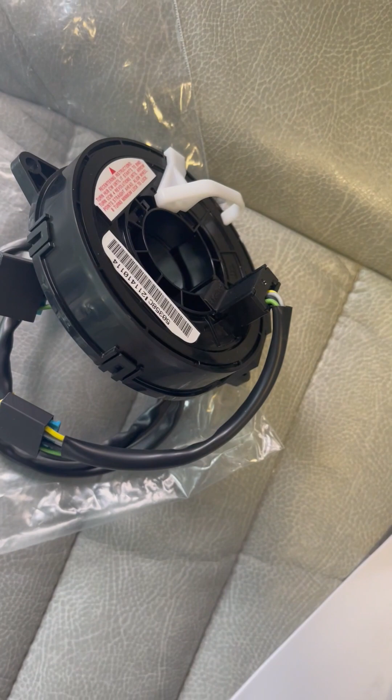Here are the parts that come with it. This is an instruction manual that we downloaded online. And here is a list of the tools that you'll need.

For step one, you got to take the top part off the steering wheel, the cover, and you basically just pull from the front first, and it just pops out. Those two little plastic things go in the two holes. There's actually 4 of them.

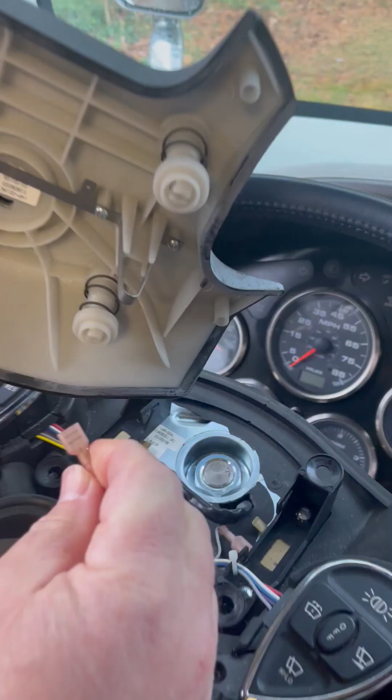Next thing you have to do is disconnect the horn. It's just a wire clip. You just pull it off, twist it back and forth. Be gentle with it, though. There it is. Next thing we have to do is take off the bolt holding down the steering wheel.

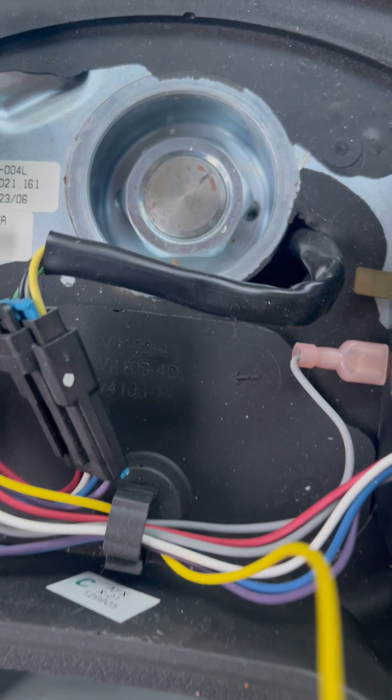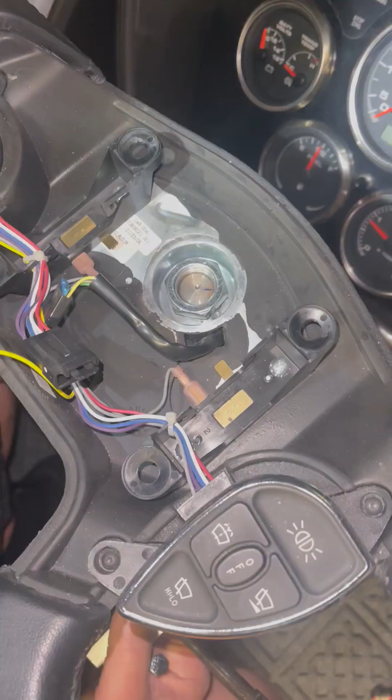And there it is. We rented sockets from AutoZone to do this. Basically put the socket on, turn it counterclockwise to loosen it up. All right, so first we have to take the bolt off.

Okay, it's off. So now we have to use the steering wheel puller. I got this at AutoZone.

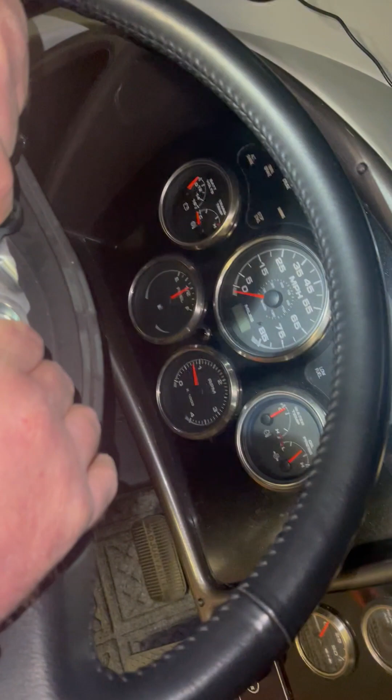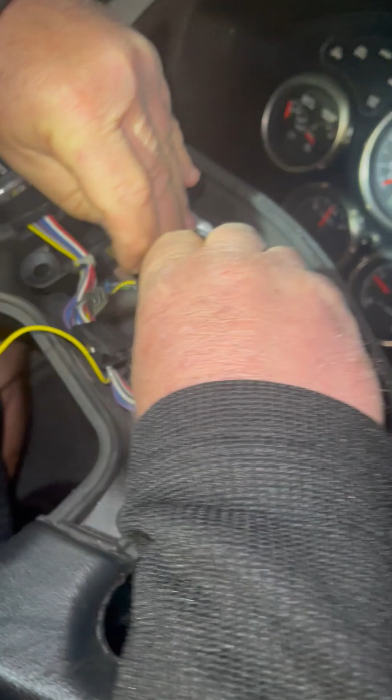And anyways, the way it works is this piece screws into here like so. This is what applies the pressure and pulls it out. But in order to hold it down, you have to use these bolts. There they are. You put one on each side, and they actually screw right down into the steering wheel.

Get an angle over here. So you screw these down in as far as they'll go. Okay, so it should look like this. Then you're going to screw this down.

Now, one thing I will say is these bolts, I had to go up to Ace Hardware and get different bolts because the ones that came with this kit did not thread into the holes into my steering wheel mount there. So I had to go get new bolts.

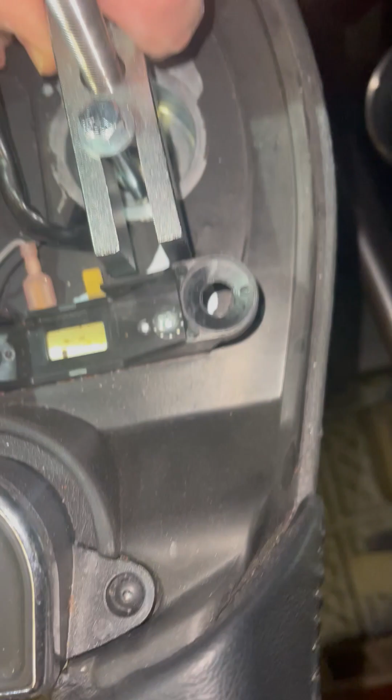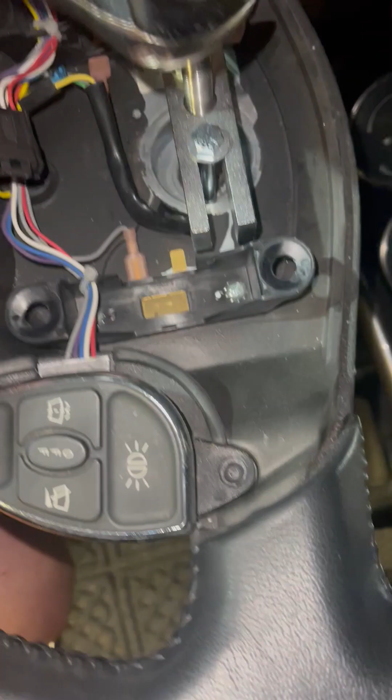And anyways, you screw this, start doing tight, make it somewhat tight. What I did, I just took a crescent wrench and went on this. You're supposed to use a socket, but I didn't have one handy. So you go like this, and it literally makes a small popping noise, making it loose. So it's loose now.

Then you just unscrew these to take it off. That's literally all this puller does. Just evenly distributes the pressure pulling upwards. And then as you can see, it pops right up. The steering wheel comes right off.

But you do have to disconnect this. This is one of the connections from the clock spring. Anyways, what you got to do is just pull back on this piece right here. You pull back, wiggle it a little bit, and it should pull right, and there it goes. It disconnects. So that, because that's going to have to go through there.

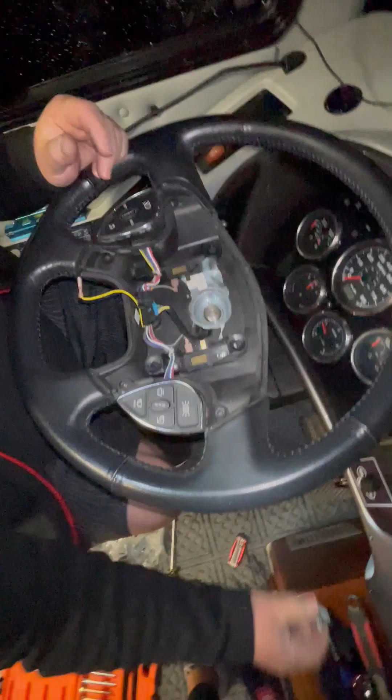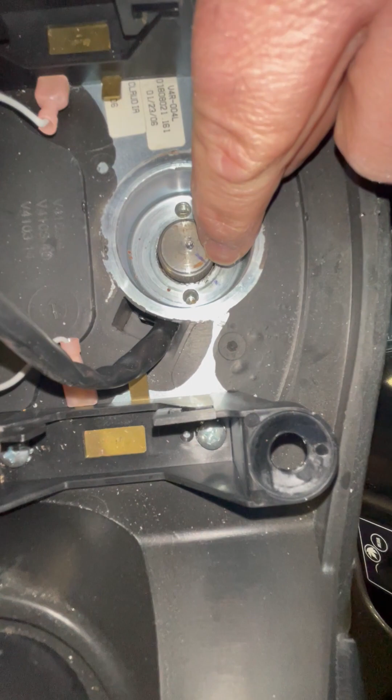Anyways, yeah, and make sure you save this bolt as well. Just keep it off to the side here. Oh, and the other thing I did do, I made a mark. You see where I took a pen? I made a mark so I knew where to put it back so it's lined up the way it was.

Okay, so with the wheel off, you can see I'm just going to push this connector through so I can pull it off. So the wheel's off now. I'm just going to put this down to the side. So then you got this plastic piece like this, and we're just going to get this plastic cover off, and right there it is.

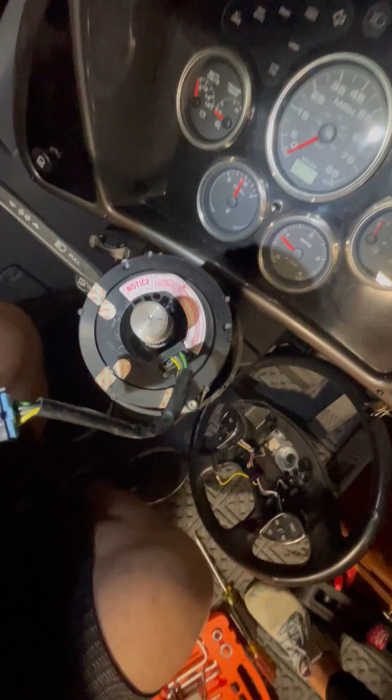All right, so here we have the gap hider. I call it the plastic cover. If you notice, it does say clock spring must be recentered before wheel can be reinstalled. I've watched a few videos on this, and I'll show you how to do that once we get to that point. It does say you do need a Torx T20 screwdriver.

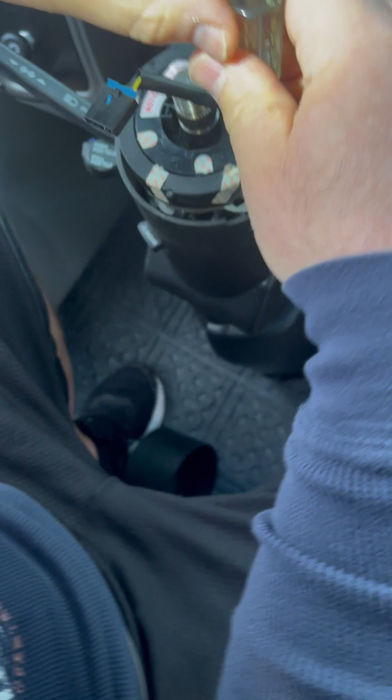Here's what the end looks like. And you can see the screws, it goes right in there. And you're just going to unscrew it like so. Make sure if there are any washers, you keep those too. It doesn't look like there are any.

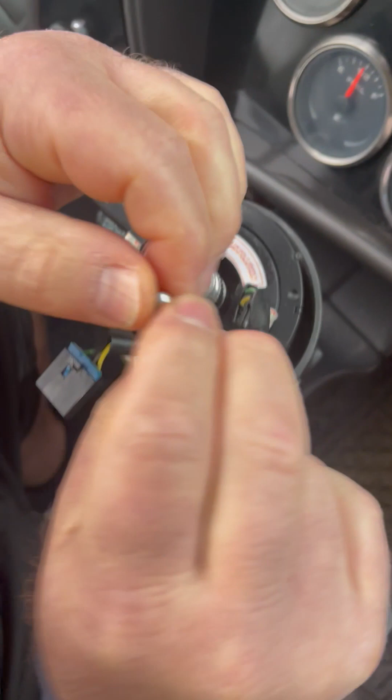There's just 2 screws, one on each side. Make sure you remember how this is aligned. It can only go back on one way, I guess. There you go. There's the other screw. Keep those screws together. And this basically just pulls right off.

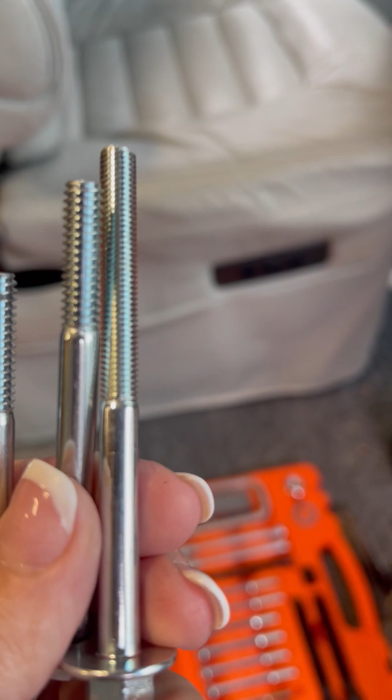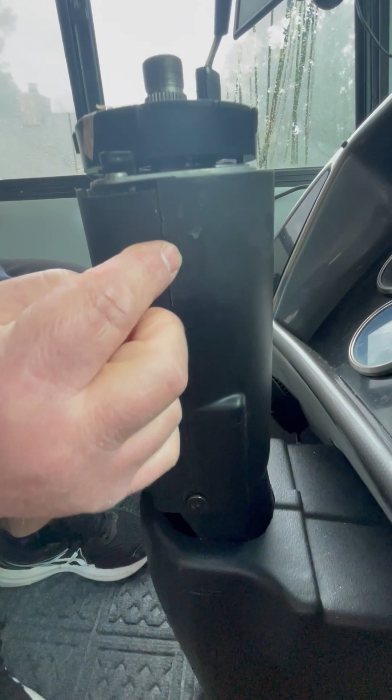So now we're going to remove the upper and lower covers that go around the steering column. If you grab, you see they're plastic things that just pinch onto these metal things right here. So if you grab underneath and just pull, you can see it pops right out. Same with the back, if you just push this way, it pops.

You just got to wiggle it. Just be careful with this, you don't want to break anything. So that comes off, make sure you keep it in the right order. And this side comes off as well. Should come off.

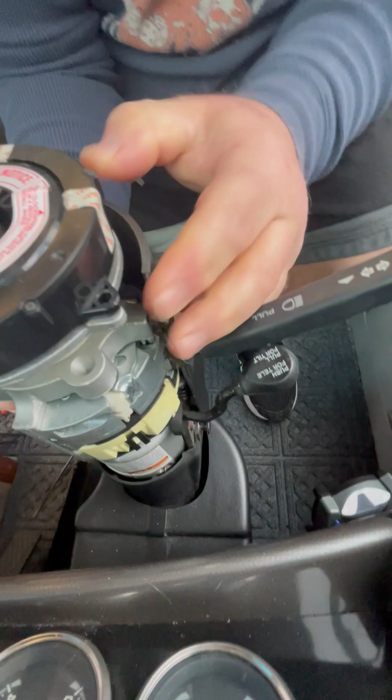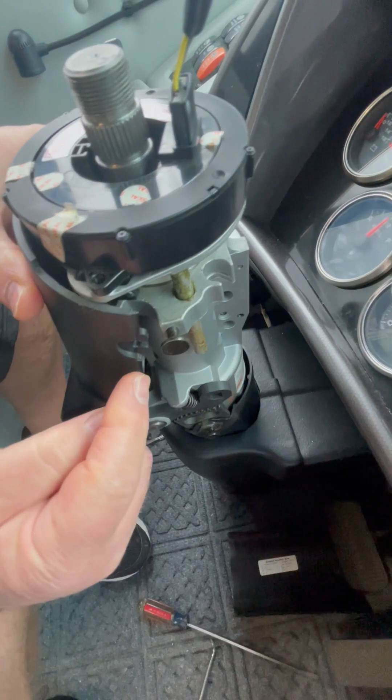So these top ones appear to be pretty tight, but you can see the plastic just loops right around this metal, so you just got to give it a little tug. Just take your time, be careful, you don't want to break that. And just put it down with the other one.

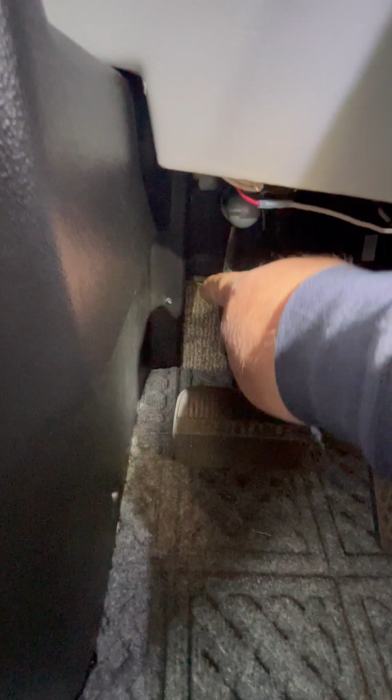So to remove this lower shroud, looks like there's 4 screws. There's one right here, there's one right here, there's one in the back there, and there's one on the other side down low. Can you see it?

There you go. So once you get the screws out, this is just a black mat that we have down, so we had to pull this out of the way. You basically just pull it off to the side so it gets around the steering column, and then you pull it out. Just be careful, it comes out fairly easy. There you go, and out it comes.

So now that we've taken the screws off the clock spring, I wanted to show you one more thing. They do say in the instructions there's a washer. Right there's a washer, make sure you don't lose that, and I'll show you more about that.

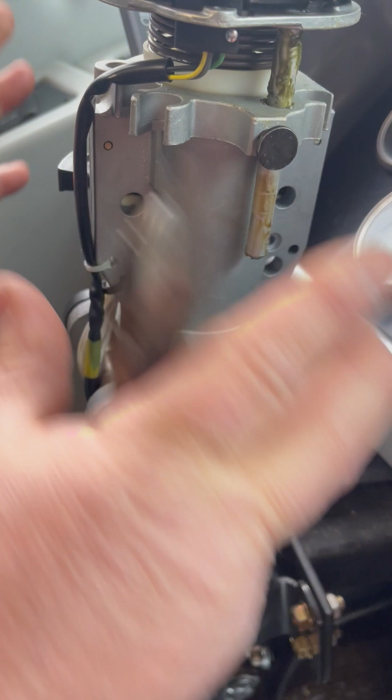But next step is we've taken the covers off. I've taken half this lower cover off. You want to follow the wires for the clock spring. They go right down the steering wheel column.

Here's a zip tie that needs to be cut, so we are going to cut this. So we're going to cut that off to free it up. And then it does go right down.

This cover can stay on. It does go down, and it goes around back here. Can you get in there? Right here is where it connects. Right there, right there is where it connects.

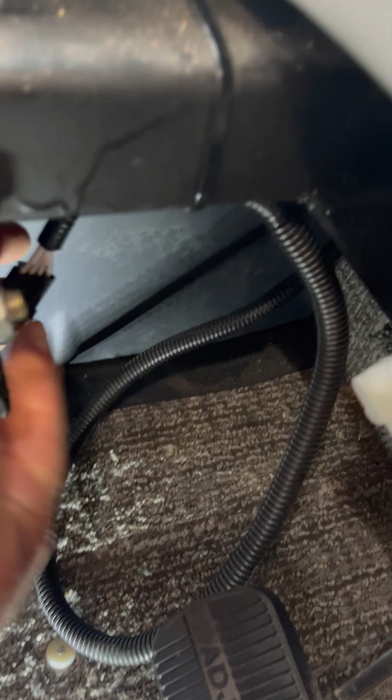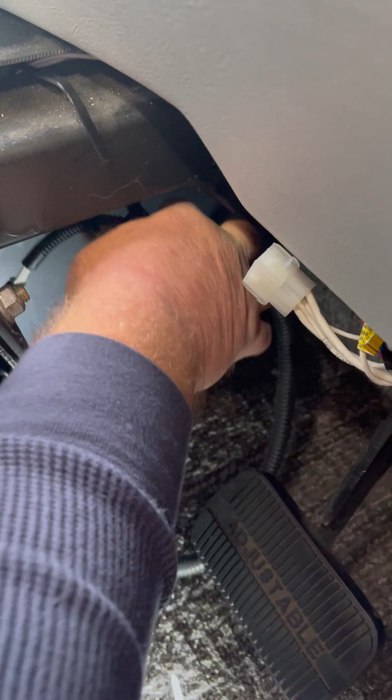There's another zip tie right here. They recommend cutting it off, see all this slack? You could pull it through and make it a whole heck of a lot easier to disconnect. So we're going to cut this, cut this one. It drops this. Actually, it doesn't drop it great, it just drops it a little. Gives you a little more room.

So right there's the connector that we have to disconnect. And I'm going to disconnect that now.

So here's how you disconnect this clip. Okay, you see right there, point, right screw, there's that little thing. That is connected to the connector. So you have to lift this up. You have to lift this plastic one up with a screwdriver. That's what I did, seemed to work.

Get it to disconnect. So you push up right there, and then you got to wiggle it out, and it comes right out. You see right there is the piece I was talking about. Right there, that plastic piece is connected to the connector, goes right in there, that holds it together.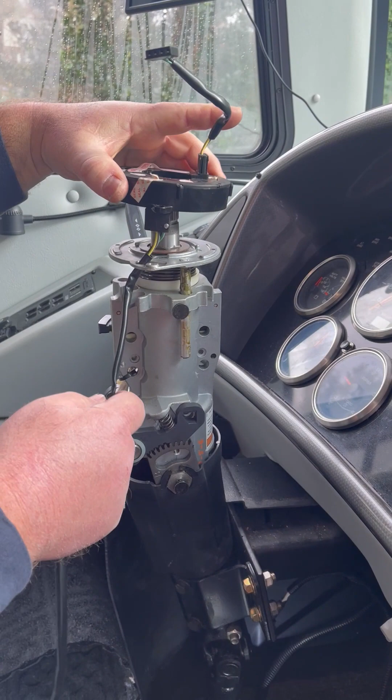Then we are going to pull the old clock spring off. Again, here's that washer I was talking about, make sure that stays put. So the instructions say it could get stuck to the bottom. Now we're just going to pull this all the way out, fish it right through, and there's the old clock spring.

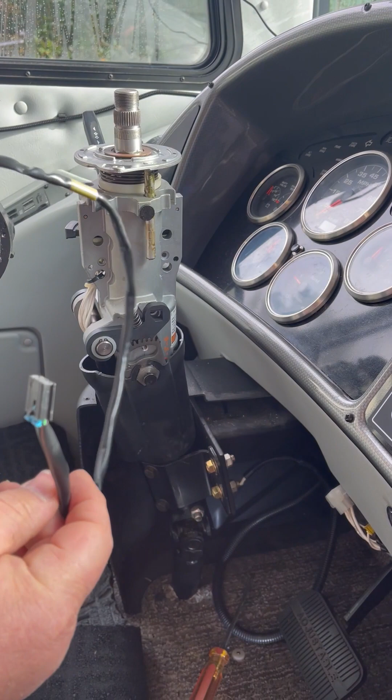So here's what comes in the new kit. You have your new clock spring, you've got a new washer, 2 new bolts, and you have a zip tie that's going to be used to hold the wire coming down. I'll show you that in a little bit. And it also comes with another zip tie.

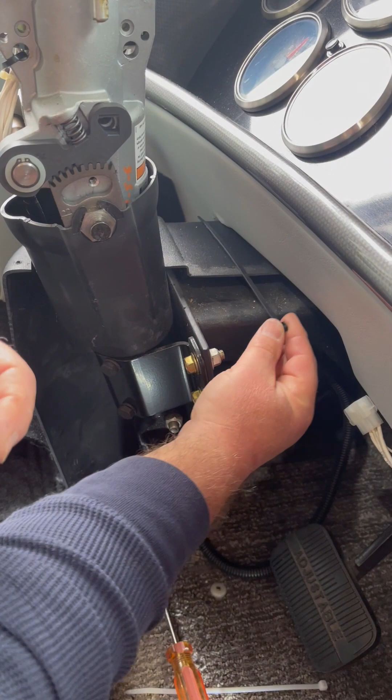Now, if you remember earlier, I cut this zip tie that was holding this up. I really didn't need to cut it, I just got up under here and I was able to disconnect the wire thing right there. The zip tie that comes with it, as you can see, won't even go around, so that's useless. I do have a bigger one, or you can connect 2 together up under there. And again, it just holds all the wires up there.

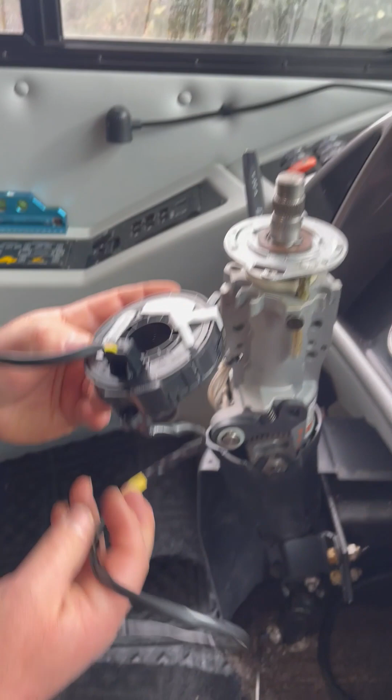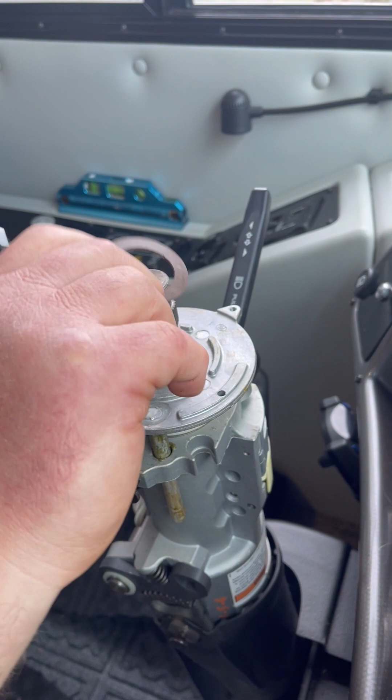So next, you take the wire, you feed it through on the clock spring. So I'm feeding that down through like so. And actually, first let's do the washer, forgot about that. This washer is actually in good shape, I don't even need to replace it, but I will. It comes with the new washer. So there's your new washer, it just goes right over there like so.

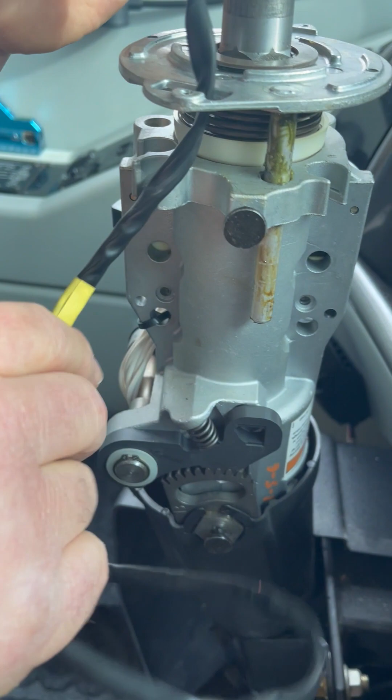Seats down on that. Then you put the new clock spring down like this. Fish the wire through right down over the center, aligning up the screw, aligning it up. So that's how it's going to look.

You then take the 2 new screws that come with it. Again, don't forget you need your Torx 20 screwdriver. Fits in there like that. Take the screws, drop it down in, like so, and screw it in.

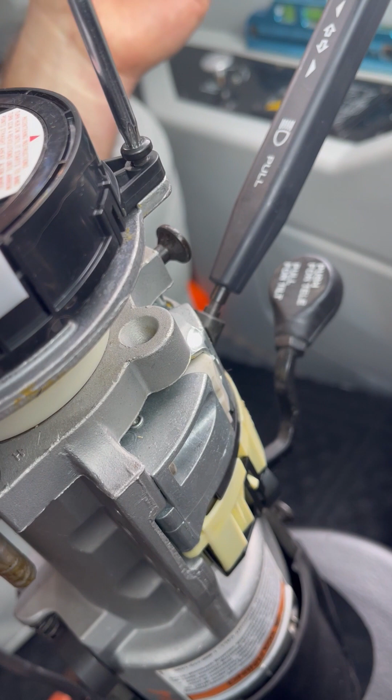Actually, it doesn't go all the way down. As you saw, I was trying to put the screws in, but these ones are bigger than the other ones, so they're not going down all the way. That's why you don't throw anything away. So we're just going to use the old screws. There's nothing wrong with them. Again, I didn't even need to replace that washer up there, it was in good shape, but seeing that we had it, we did.

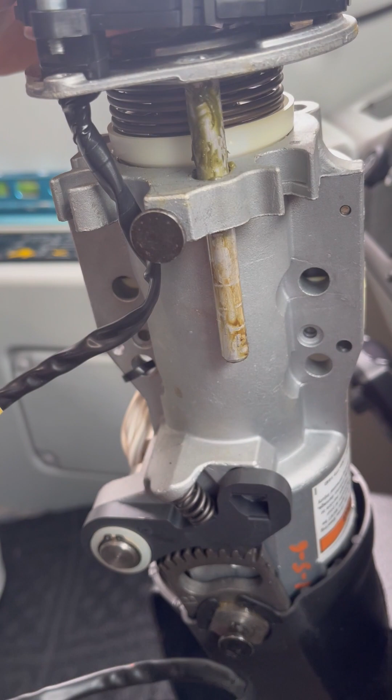So we're going to line these up like so. See, those go right in. We're going to do the other side too, like so. Just make it snug, I wouldn't go too crazy since this is a plastic part. So I just snug both sides a few times to make sure we're good. And we're good, so that's in there now.

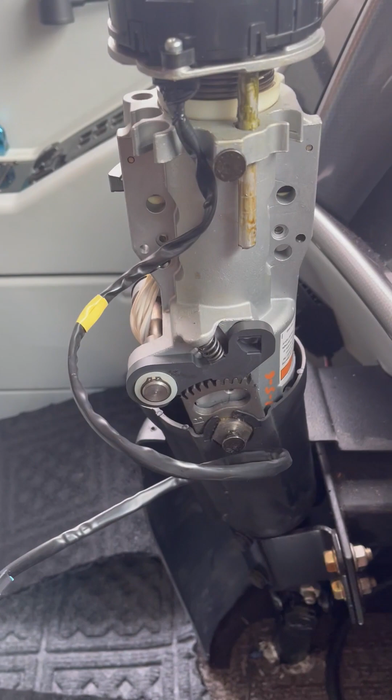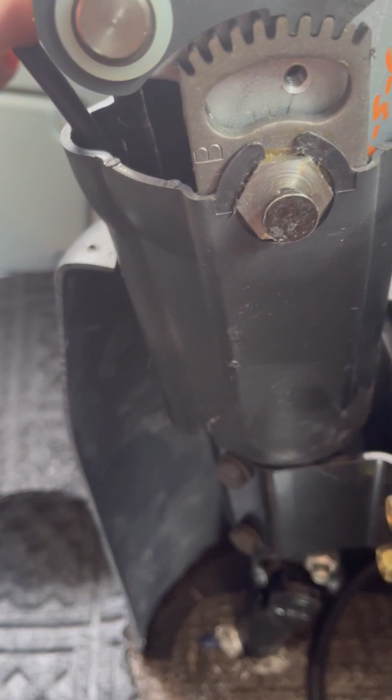Now we're going to continue to run the wire down. It was connected right here, so we're going to run it down the shroud. Now, they said to cut the old one and fish it through, but what I found is I didn't want to cut the old one. So you push this down the hole, you can actually feel it right here. I just got a pair of needle nose, grabbed it lightly, pulled it right out. You can see it comes right through. So that's all there is to that.

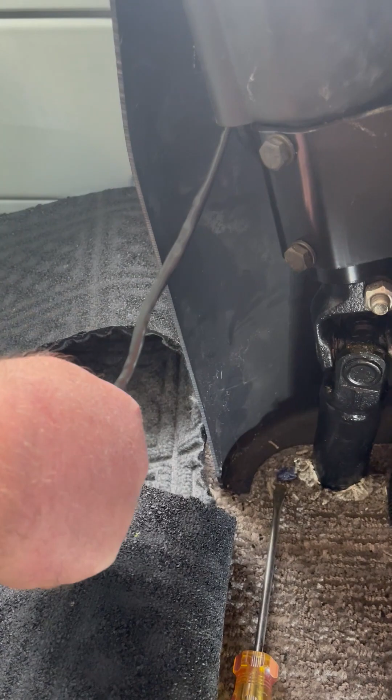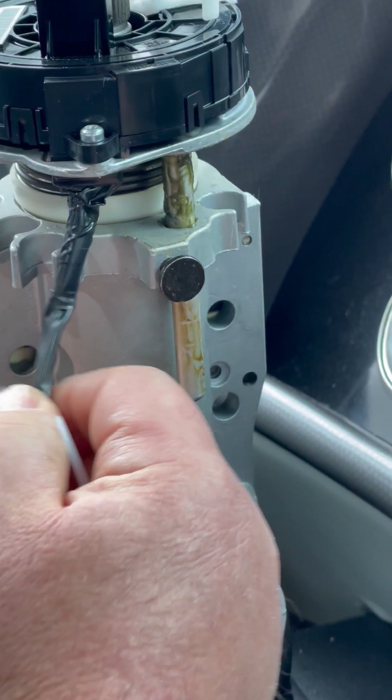Again, we're going to take a zip tie and we're going to zip tie this. Make sure you're taking pictures as you're undoing this stuff, because I was going to route this here at first, then move it over to here in this little crack. But then I looked at my last picture and it looks like it's routed just like this, the way the old one was.

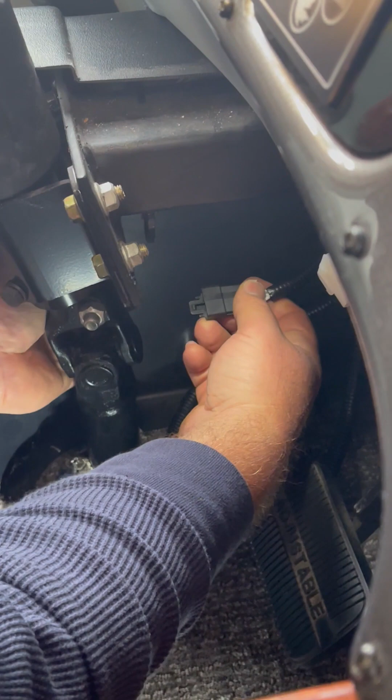So we're just going to take this and use the zip tie they gave us. We're going to zip tie it just like so, leaving a little bit of slack there, just like that. And then this will go down, and then we'll connect this to this piece under here. It'll just connect right to it, and it can only go on one way, which is good.

So once you get it in, you want to listen for a click when you push it. Remember that one piece I showed you earlier? So this thing is secure, it's clicked.

After reading further in the instructions, I noticed it said when you're putting the zip tie on to hold this wire, if you have a telescoping steering wheel, it should be extended all the way up. So what I did is hold down on the telescoping button and let it slide all the way up, and you can see it pulls the wire up.

So now you put your zip tie through like so, and don't make it too snug. You want it a little loose so it has a little bit of play in there. Right about there is probably good. This way, when you push down on the telescope, it has flex room in there. See that? When it goes up, it pulls up, and when it goes down, it goes down. That should be perfect right like that.

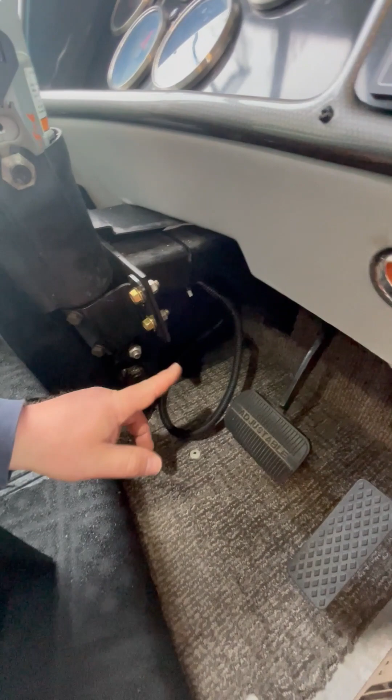I did put a new zip tie around here. As I said earlier, I cut it, but it wasn't necessary, there was enough play down here to take the connectors apart and put the new one together. So I did put a new zip tie there, it just holds this wire up out of the way.

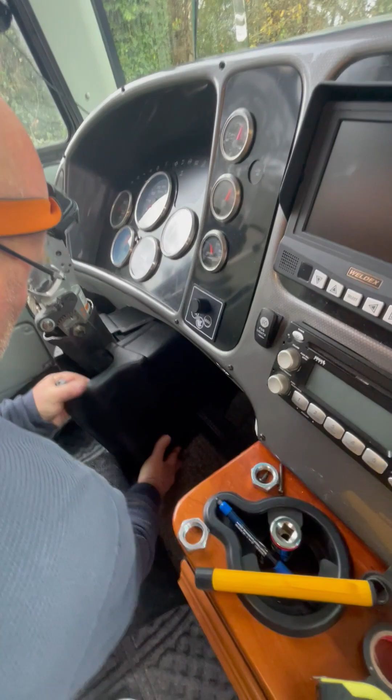Now we're going to put the shrouds back in just like we took them out. Again, you just got to maneuver it up in here like so, just like this. It's sort of a tight fit, but don't force it. I got caught up on a carpet nail here, so I lifted it over, and again, we're just pushing up in there and over on the side like so.

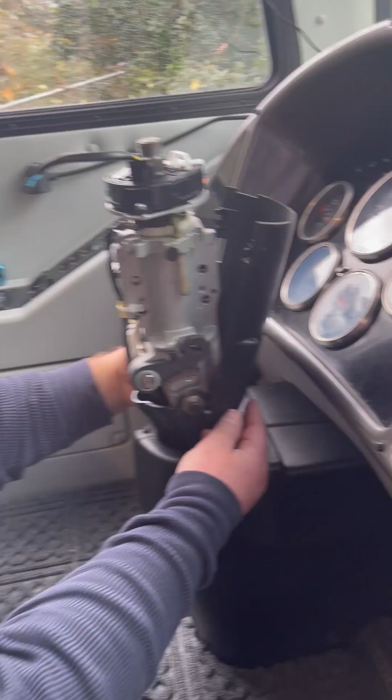You just got to maneuver it in like that, and there you go. Then you just got to put the screw here, put a screw down here, put the one in the back there, and that's it.

All right, so we're going to put these middle covers on here. Again, you have to make sure this plastic goes right over this metal thing. It just clicks right on. There's one on this side too, which I got right here. Click it on, click this side on, like so. Then work your way up to the top. Click, click. You see how it just goes on. It went on way easier than it came off.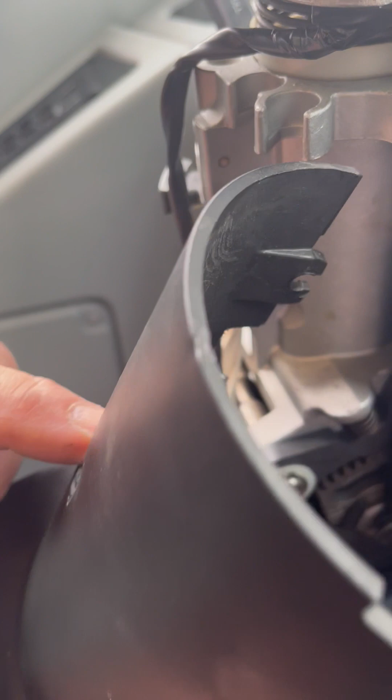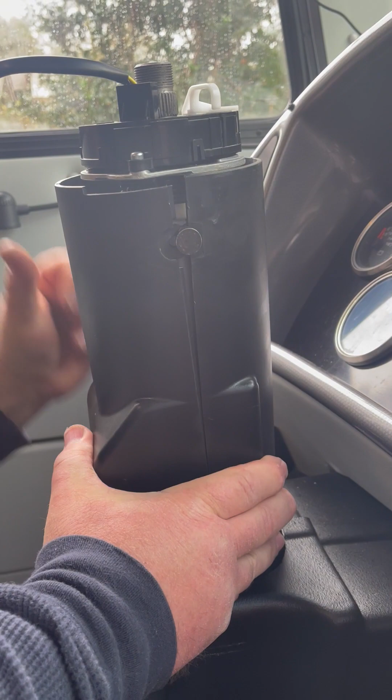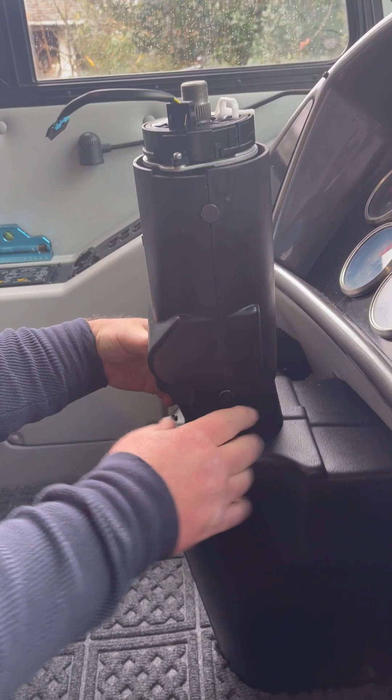We're going to pull this off because we need to recenter it. The recentering instructions say turn the hub clockwise until it starts to bind. Again, don't go too hard. There is wire on the inside, and if you go too hard, you'll snap it off. You don't want to do that.

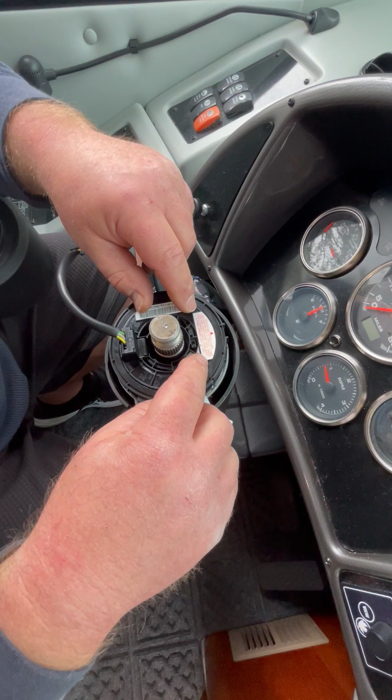Turn it counterclockwise 4 revolutions until the arrow is pointing straight ahead, then align the wheel. So we're going to do that. So we're going to push it all the way to the right until it gets a little snug. See, it's starting to get snug right there.

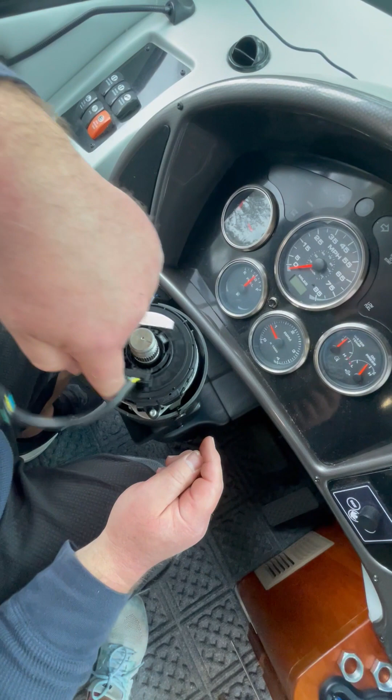So we're going to start with this arrow at the top. So we're going to go 4 revolutions counterclockwise. 1, 2, 3, 4. And right there, it's at its loosest right there. And again, you want to make sure this is pointing forward.

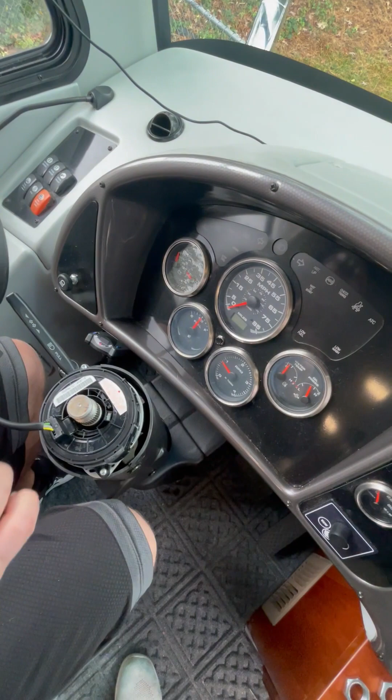Next thing we're going to do is we are going to feed this back through this, like so. And again, you could look in there and make sure it's going straight up and down. This is in the correct position when this is at the bottom. At least on ours it is.

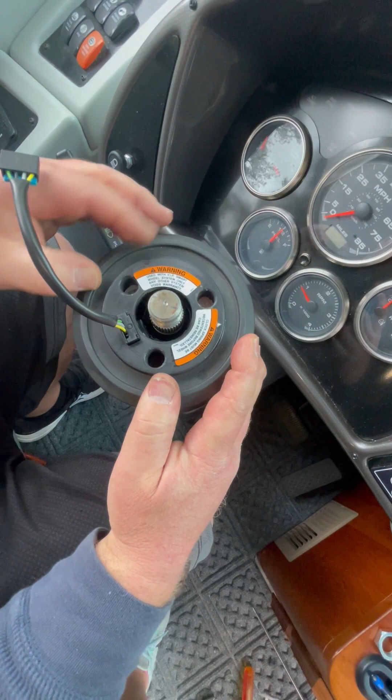So the next step is to put the steering wheel on. First thing we have to do is fish this wire up through this hole from the backside. So we're going to go like this, fish it through just like this, and pull it up as we go through.

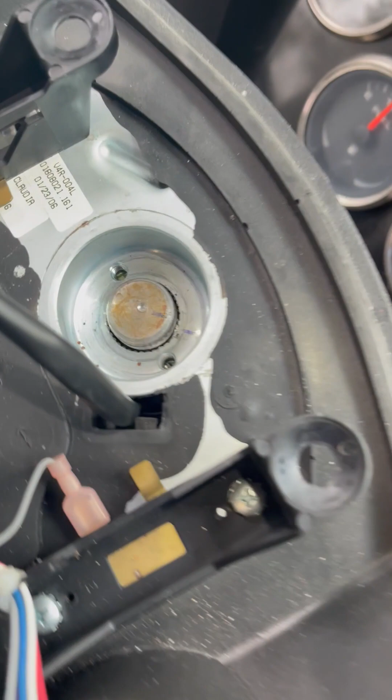And now when we're putting this back on, we're going to make sure, if you remember there were blue lines, make sure your lines are lined up. So when you take this off, you mark the lines so you put it on exactly the way it was. Put a little upward pressure on this. Now you just got to make sure it's lined up. There it goes, and you can see it goes right down. Don't force it because you don't want to mess up any of those teeth down there.

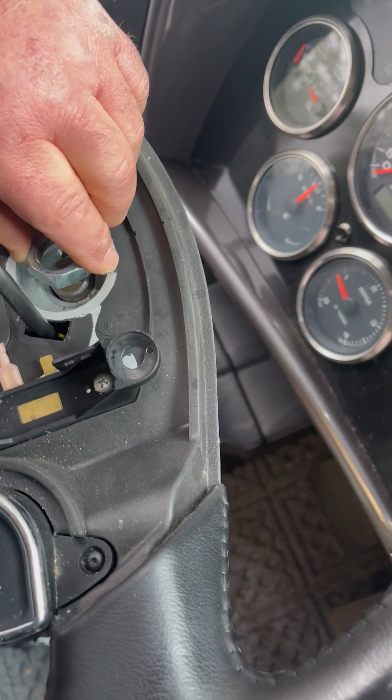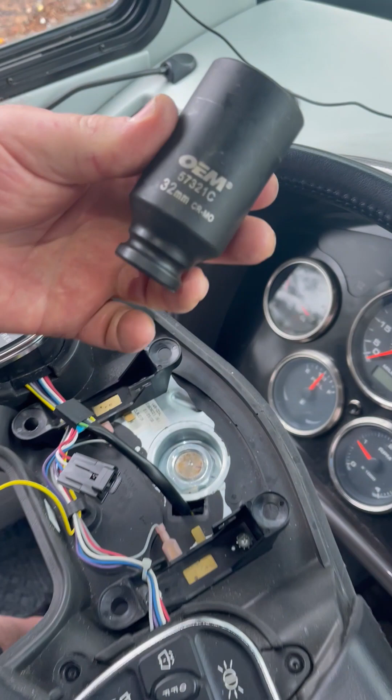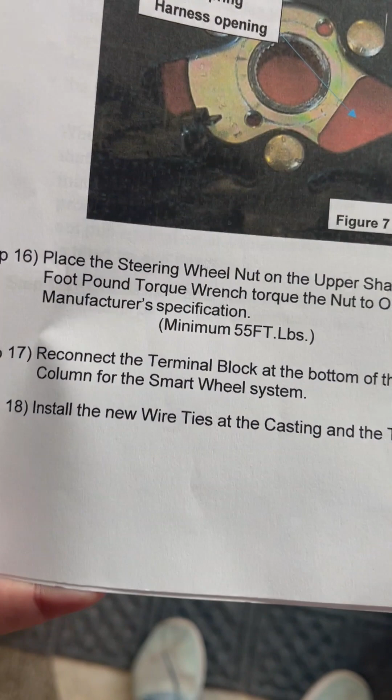So there it is. Next thing we're going to do is we're going to put on the nut. We're just going to get it on there by hand at first. All right, so I have the nut on hand tight, and what I'm using is a 32 millimeter socket. Here's a set that I picked up at AutoZone. It was actually an axle nut socket set. The instructions say to get a steering wheel socket, but all these nuts are different sizes.

Anyway, you should also get a torque wrench with a minimum of 55 pounds to tighten this back up. They didn't have one, so I'm just going to torque it on by feel. Anyway, so I'm using a 32 millimeter. As you can see, there's a little bit of play. It's not going to hurt anything.

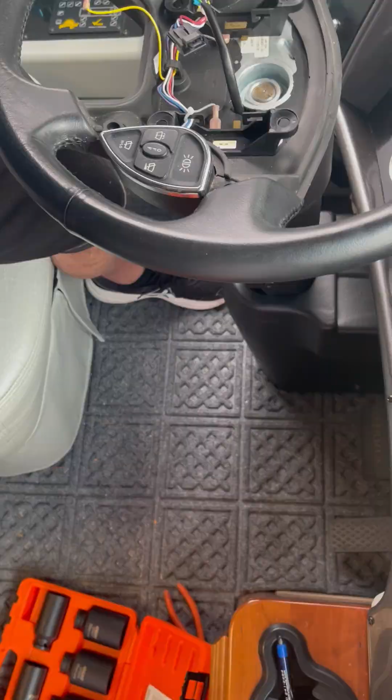Put on, and we're just going to tighten this thing up. And that should be good. You don't have to go crazy on it, but make it snug. You can see that it's tight. The wheel's tight, it's turning.

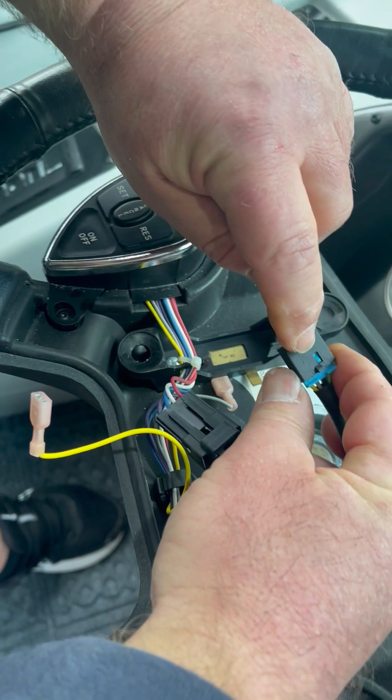We're good. The next step is going to be to connect the wires together. Remember, you have that little clip right there on the top, and that goes right up on the top here. So that's what holds it together. And you just line it up, push it in, you hear that little click, and boom, you're good.

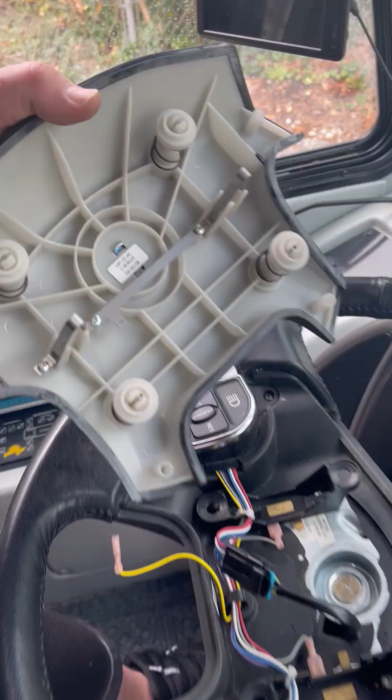So next thing we're going to do is we're going to hook the horn back up, and the horn just clips right on there, just like that. And you just have to line these 4 up with these holes right here, and again, they just push in. So we're going to line them up, go in the back, hear the little click, in the front, and you got to hear my horn.